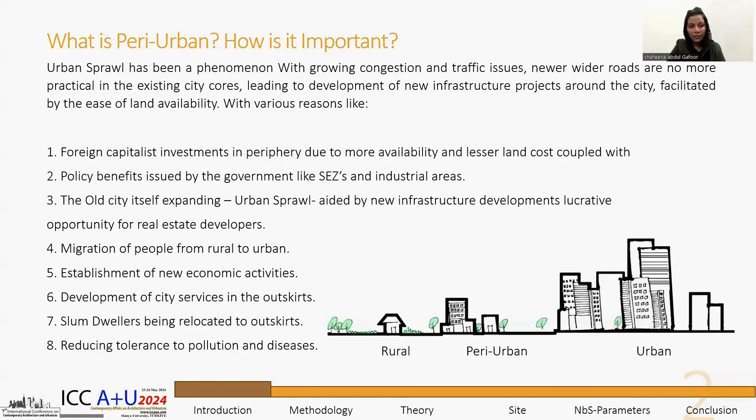My research question is: if city growth and expansion is inevitable, are there sustainable approaches to planning growth that can be used? If so, how?

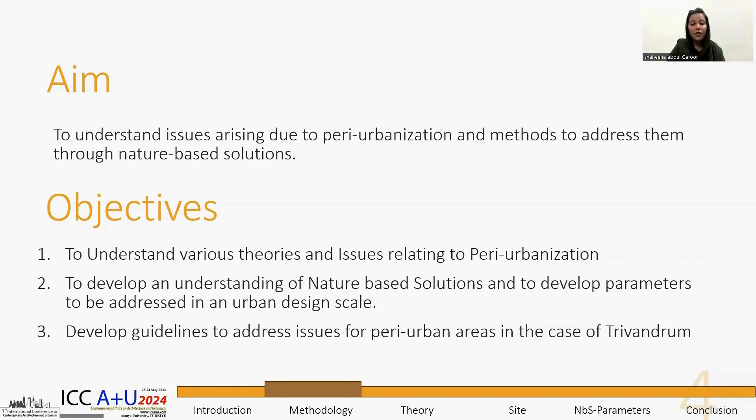The aim of the study is to understand issues arising due to peri-urbanization and methods to address them through nature-based solutions. My objectives are to understand various theories and issues relating to peri-urbanization, develop an understanding of nature-based solutions, develop parameters to be addressed at an urban design scale, and develop guidelines to address issues of peri-urban areas in the case of Trivandrum, Kerala, India.

The methodology of my study has been structured as such. Peri-urban areas exhibit physical parameters such as a lack of spatial planning, variation in density, presence of natural elements, and recent investments or developments in social, physical, or civic infrastructure. These infrastructure developments also enable greater accessibility to the core city or major destinations, and show a major shift in land use and land cover.

By the social parameters, they exhibit a sense of employment character in the primary sector, which is reflected in the economic sector-wise employment also. In terms of governance, these areas exhibit inadequate housing, water supply, sewage management, and drainage.

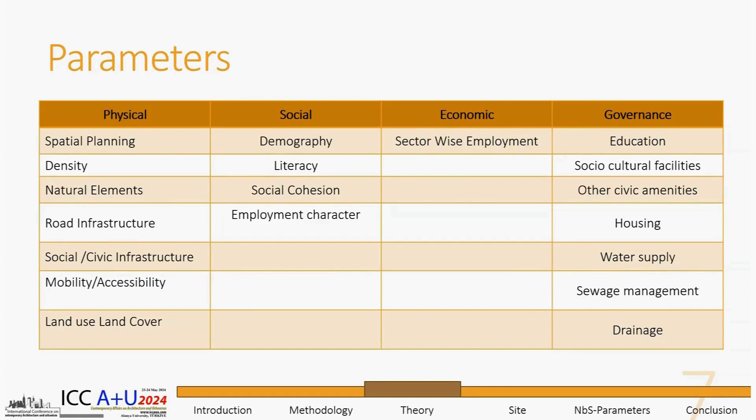Typologies of peri-urban areas are characterized into village peri-urban, diffuse peri-urban, chain peri-urban, absorbed peri-urban, and in-place peri-urban.

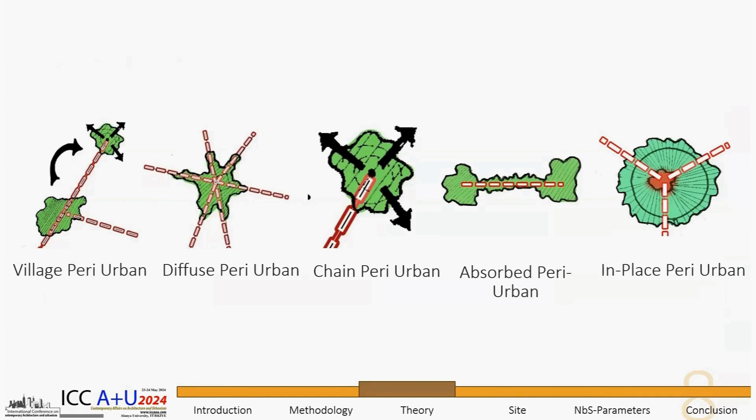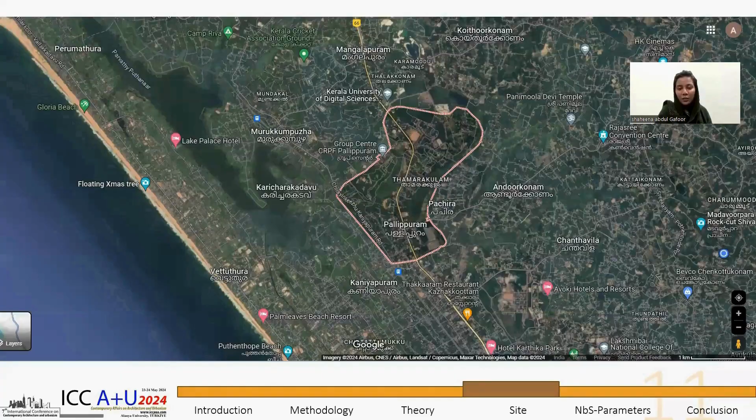Based on the peri-urbanization study in the context of Trivandrum, the peri-urban areas of Trivandrum have been identified, and a site at Pallippuram has been chosen for the study. The relevance of the site is because of the presence of an IT hub, which until recently was a peri-urban area but got incorporated into the master plans of the city.

Due to the incorporation of the IT hub, there have been more investments and infrastructure developments in the connecting edges, such as road widening and metro stations in the corridor. This road also acts as a major connecting node to other districts of the state.

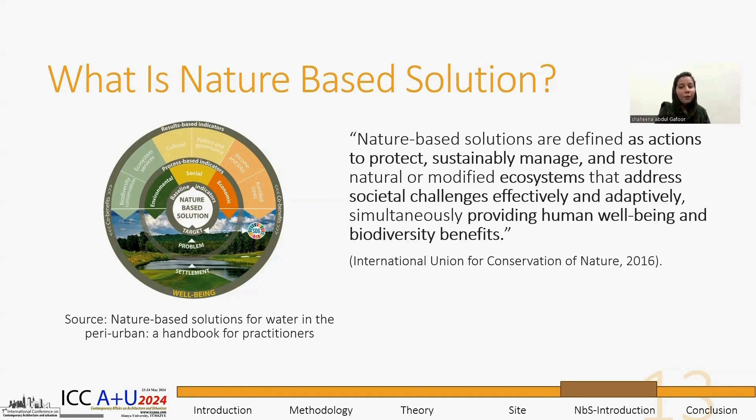To address such haphazard development and to incorporate communities, nature-based solutions were identified as an ideal solution, because they are known to sustainably manage and restore natural or modified ecosystems that address societal challenges effectively and adaptively, simultaneously providing human well-being and biodiversity benefits.

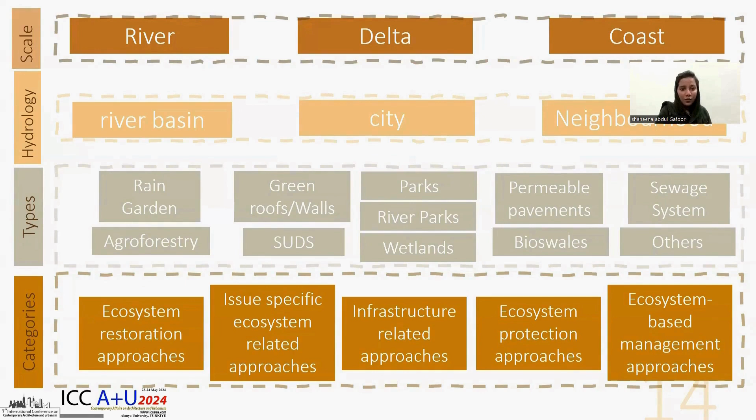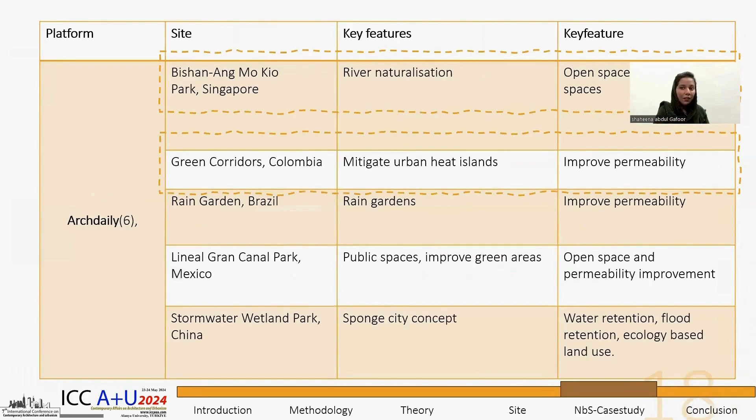A detailed understanding of various nature-based approaches helped create a typology of different types based on scale, hydrology, types, and categories of nature-based solution interventions. Further research based on case studies of NBS approaches in peri-urban areas was conducted, and different typologies of strategies were identified.

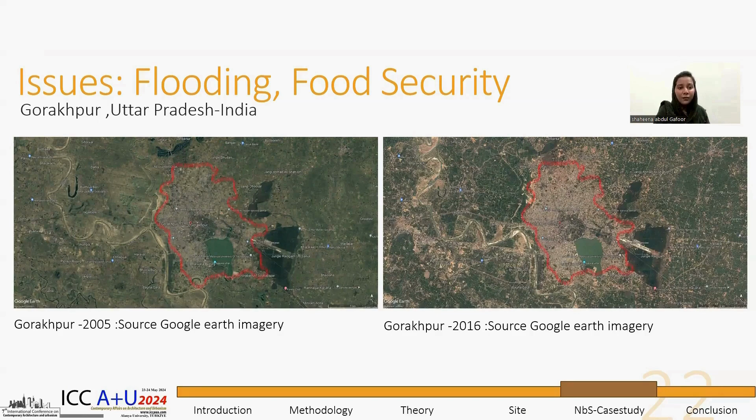In the case of flooding and food security in Gorakhpur, Uttar Pradesh, India, the farmers were incorporated into the peri-urbanization process and into creating flood resilience for the city, as well as generating increased income and revenue sources for them.

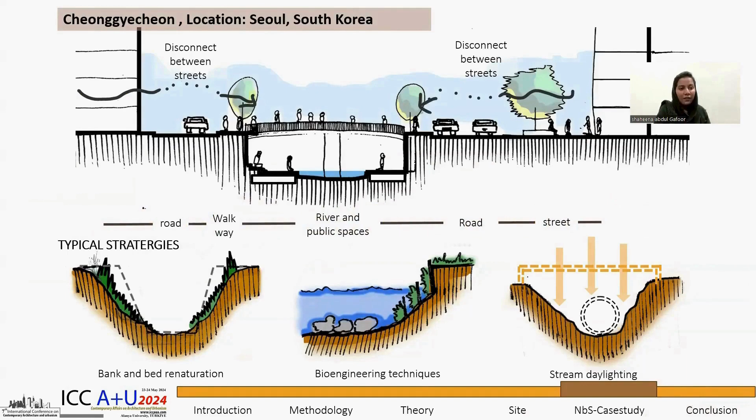The second strategy is river and stream restoration. In these case studies, I have identified typical strategies that have been chosen to implement this.

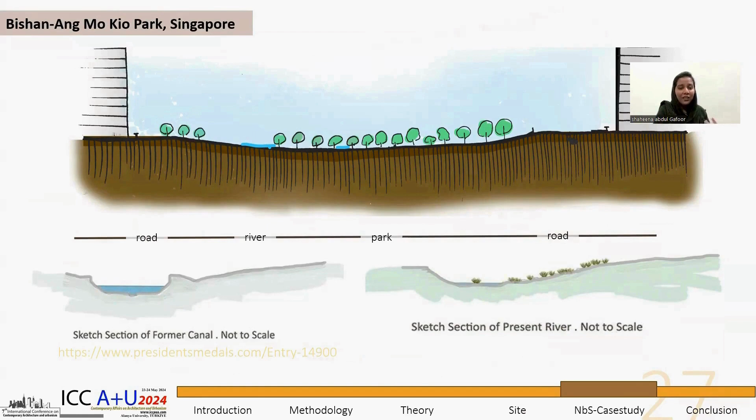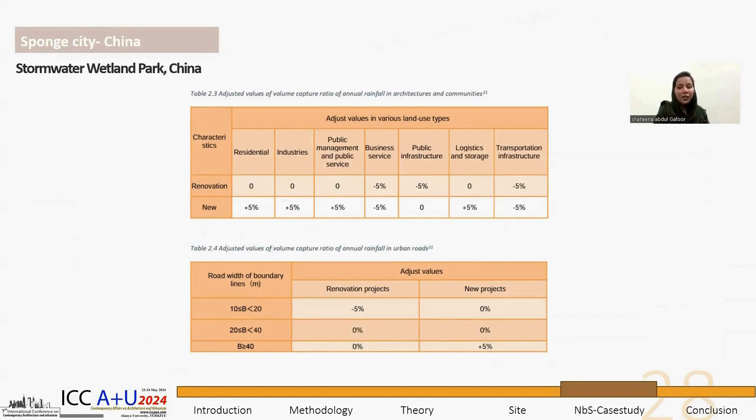Through delimiting natural elements, these approaches try to address nature-based solutions while being beneficial for the urban community. But a limitation of the study is that all of them are qualitative and not quantitative. In the case of Sponge City in China, however, they have addressed a guideline of how this can be done in a quantitative manner.

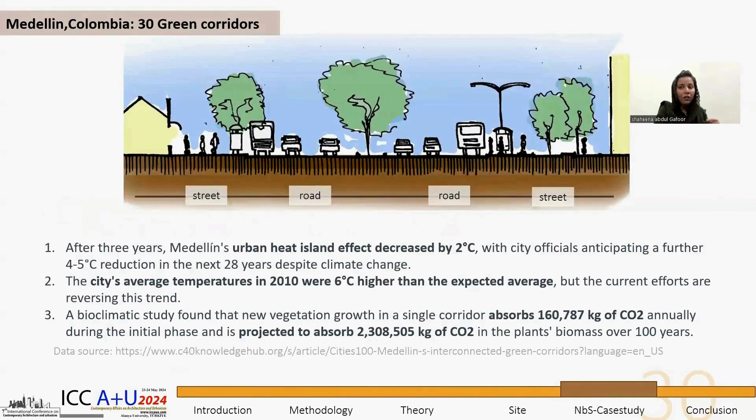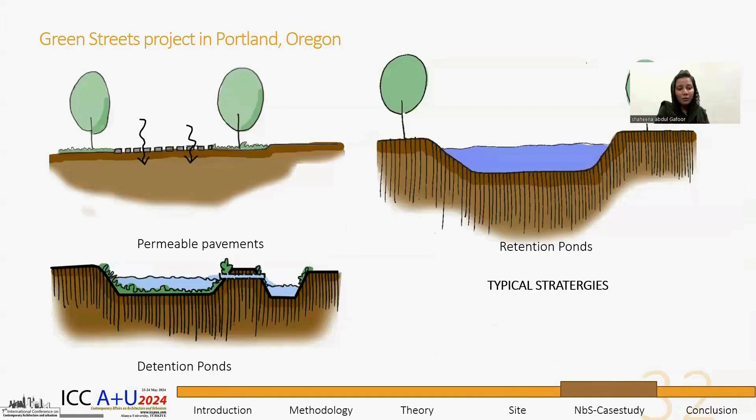The next strategy is the Green Corridor, where temperature decrease has been found to be 2 degrees Celsius. Also, the next strategy is about bioretention areas, where existing land has been altered to increase surface area, acting as permeable areas, detention ponds, and retention ponds.

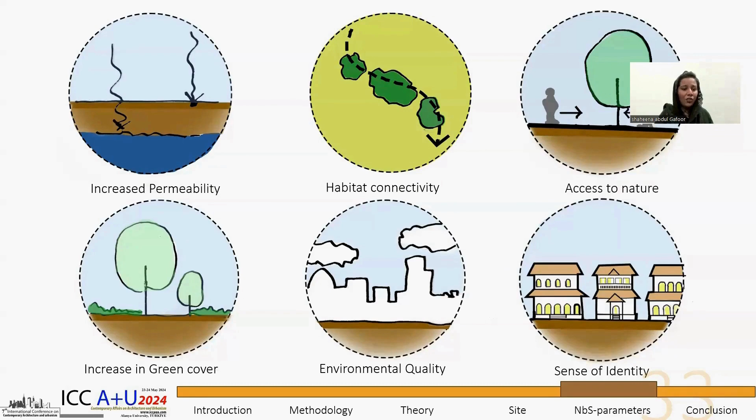Parameters addressed through these interventions have been identified, which include increased permeability, habitat connectivity, access to nature, increase in green cover, environmental quality, and sense of identity.

Talking about the site, the Kadinamkulam Lake, the Panvel-Kanyakumari Highway, and the railway line are three major factors that have affected the development of the site. The Kadinamkulam Lake acts as an ecological asset to the area. The presence of the railway line and the highway has historically caused development pressures in this area, and the redevelopment of the highway has further intensified these pressures.

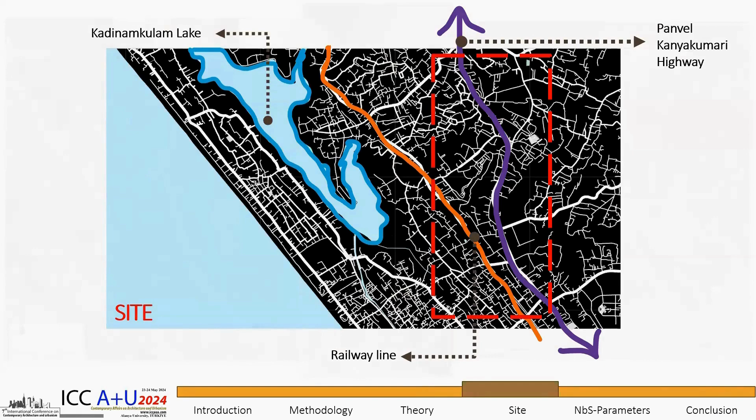With the comparison of the 2011 and 2023 satellite images, we can clearly see three major areas that have been affected by these development pressures.

The first is the Kadinamkulam Lake and its adjacent water networks and their connections and incorporation with the community. The second is the ribbon development of the road networks and the intensity of development and changes happening at these road edges.

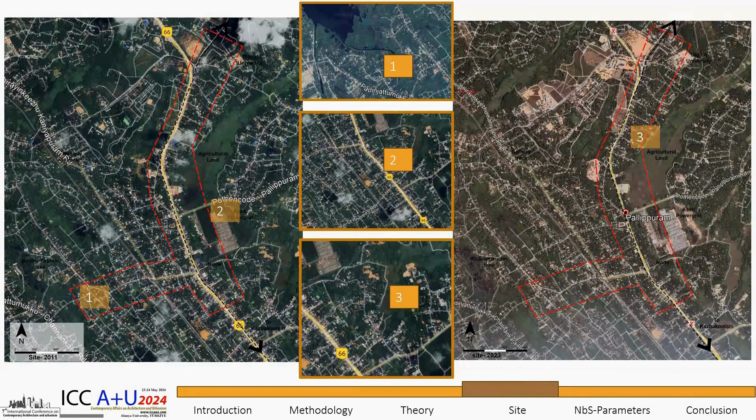The third area is the change of agricultural lands, where residential areas have become more developed and intensified, and more agricultural land has now been converted into residential or other purposes.

Through an ecological perspective of understanding the site, we can see that road development has taken place by connecting different higher altitudes of the site.

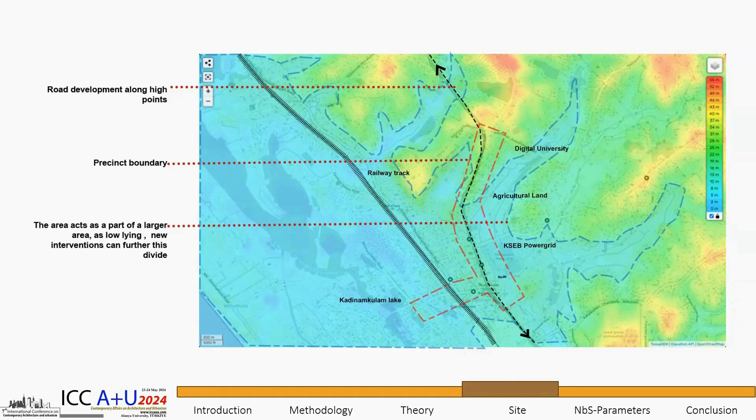The development of the road and railway track has already fragmented the agricultural ecosystem into different fragmented pieces, which will cause further issues in the very near future.

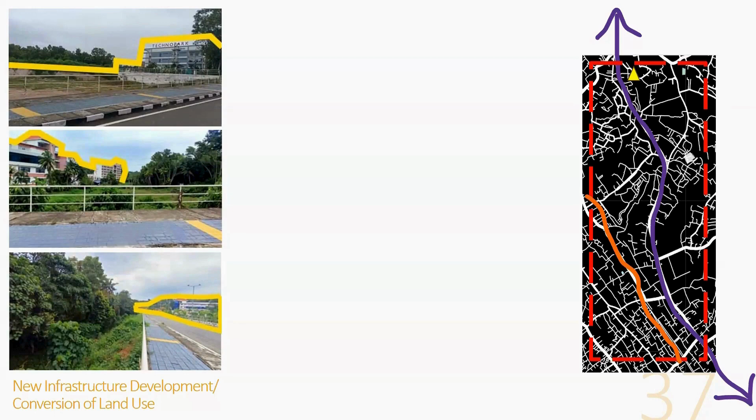To understand the site, infrastructure development and conversion of land use has been intensified by the development of Technopark and the Digital University, which has created a rapid change of agricultural land use. The loss of agricultural area to residential areas has further intensified the food scarcity and food security issues of the region.

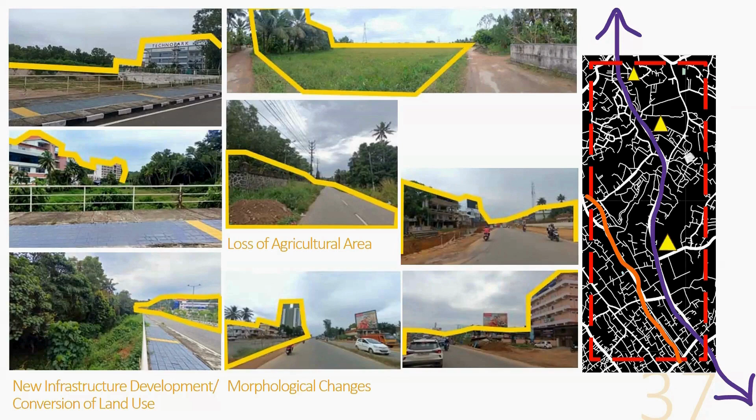We can also see that road development and development pressures have created morphological changes over the years.

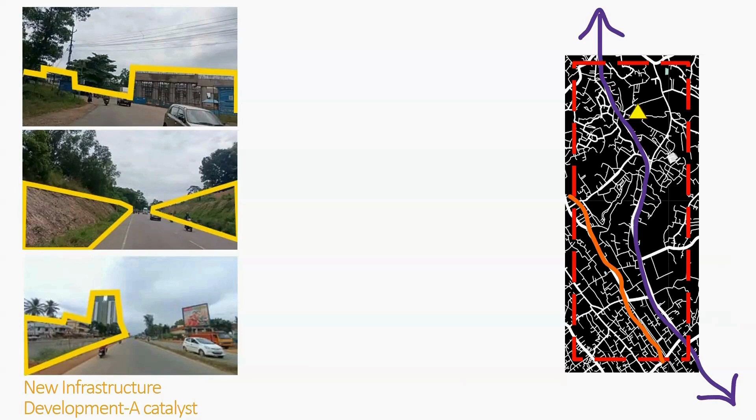Due to new infrastructure development that disregards the ecological constraints or context of the site, development has only been understood and analyzed through an economic perspective of cost-benefit analysis, never through an ecological perspective. This has caused, and will cause, further issues in the near future.

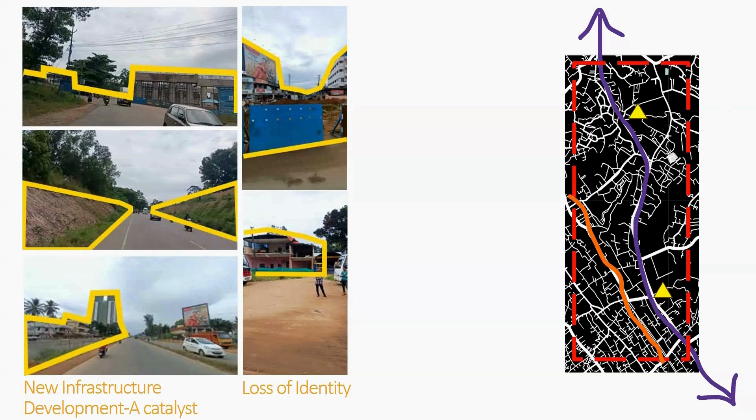Talking about identity loss and morphological changes, through the images we can see that buildings have been chiseled out through their facades, creating a total lack of identity or disconnect between the streets and people in these communities, as well as the user groups using these roads. So there is a total loss of identity happening here.

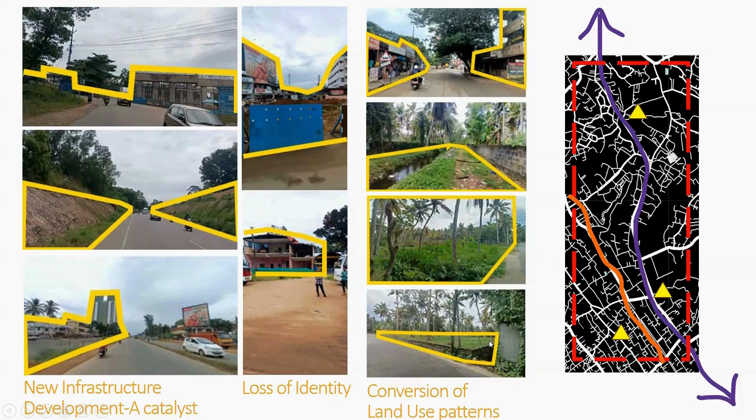But now these areas, due to their higher value, have been cut off and parceled into smaller land plots because of the economic value, and these will be sold off very soon.

To compress and understand all the changes, I've come up with a list of tables showing how changes due to peri-urbanization cause issues, and how these issues can be approached through various NBS approaches, found through the case studies.

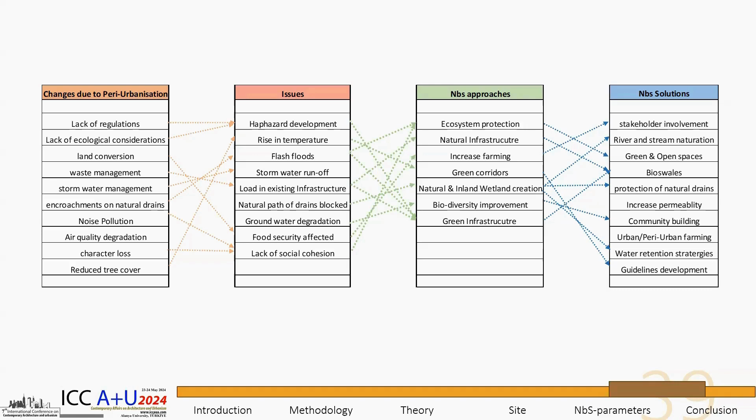And from the case studies, what kind of NBS solutions can be proposed.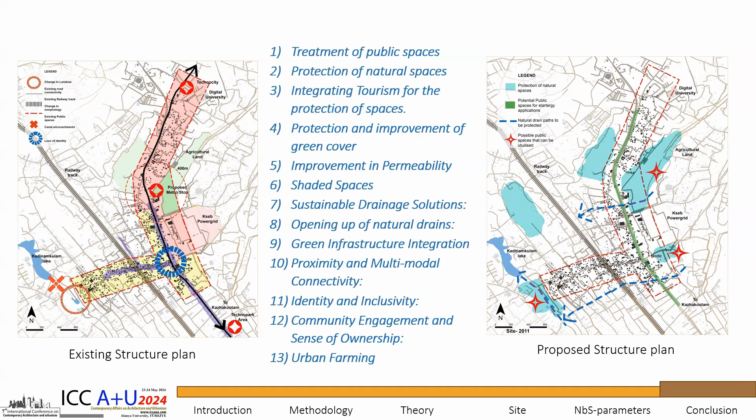The proposed structure plan, which proposes areas that need protection or spaces that need to be addressed, has been marked and mapped. This structure plan includes protection spaces, natural spaces that need protection, potential public spaces for strategy applications, and natural drain paths that need to be protected immediately, as well as possible public spaces that can be utilized.